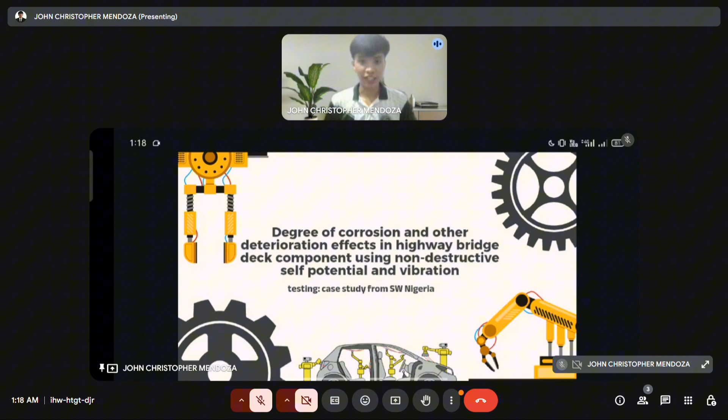Next, the topic outline includes the background, introduction, methodology, results and discussion, and the conclusion. First is the background. The study illustrates key structural components of a bridge: abutment, piers, expansion joint, deck surface, surrounding environment, and spread footing, highlighting signs of deterioration due to corrosion, vibration, and environmental exposure.

The abutment shows vegetation and possible erosion, while the piers are vulnerable to water-induced cracking and corrosion. A damaged expansion joint may cause stress concentration and material degradation. Surface wear and misalignment on the deck indicate possible foundation movement. The nearby river bank suggests erosion risk, and the spread footing is exposed to potential scour and settlement.

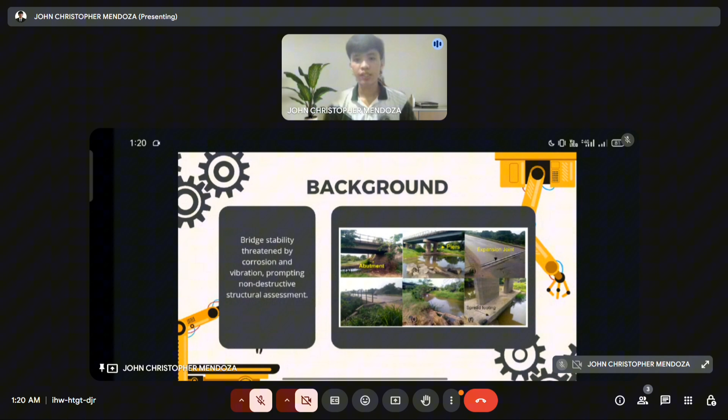These signs underscore the need for non-destructive structural assessment such as ultrasonic testing and ground penetrating radar to evaluate internal damage and ensure the bridge's stability and safety without causing further harm.

And for the introduction, this study assesses corrosion and vibration in Ogbese Bridge using combined non-destructive electrochemical and vibration methods. The image introduces the study aimed at evaluating the structural health of the Ogbese Bridge, with a particular focus on the effect of corrosion and vibration.

The study uses a combined approach of non-destructive electrochemical and vibration-based methods to assess the bridge condition. This method is particularly important because it allows for a comprehensive diagnosis of internal and external structural issues without damaging the bridge. The choice of this technique reflects the need for precise, real-time data to detect early signs of deterioration and inform appropriate maintenance strategies.

The image states the primary objective of the study, assessing the corrosion and vibration, while the right side presents a conceptual model that explains how corrosion progresses over time and the implication it has for maintenance and structural integrity. The graph divides the corrosion lifecycle into three distinct phases: the corrosion initiation phase, corrosion propagation phase, and finally the replace or failure phase.

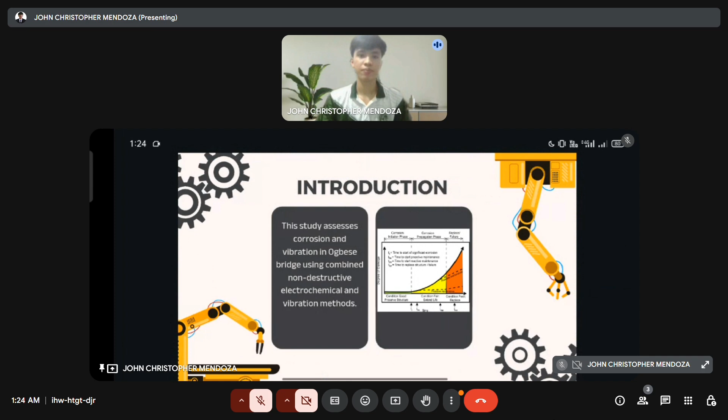And then for the methodology, these factors are critical in understanding deterioration patterns that can compromise the structural integrity of the bridge over time. Corrosion, for example, can weaken metal components such as steel girders, while the mechanical vibration caused by traffic loads or environmental forces can lead to fatigue and eventually failure of structural elements.

The influence of environmental conditions such as moisture and temperature variations further accelerates the degradation process. The image of this bridge especially highlights the steel girders, which are essentially load-bearing components. These girders are more often susceptible to corrosion due to exposure to the elements.

The visual serves to contextualize the study by offering a real-time view. The bridge structure helps to identify where such deterioration might occur, emphasizing the importance of continuous monitoring and maintenance to ensure structural safety.

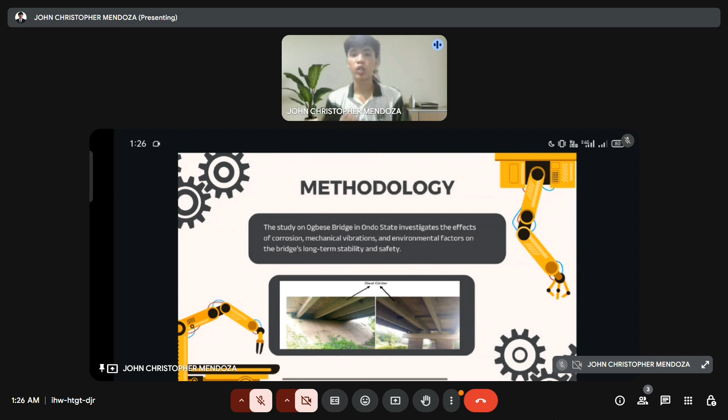For the data acquisition and analysis, the first image presents the detailed layout of the data collection process across the entire bridge structure. It shows the strategic placement of traverses, horizontal surveys running across the width of the bridge, and the data points SP along the length of the bridge from the southwest to the northeast.

The bridge is divided into four spans supported by the abutment and piers, with a specific emphasis on vibration measurement positions on the piers. These points help to capture mechanical vibration affecting the bridge stability. The inclusion of pedestrian walkways and central zones in the traverse arrangement. Traverse 3 is labeled as ground penetrating radar or GPR, which is used to investigate subsurface conditions that may not be visible on the surface.

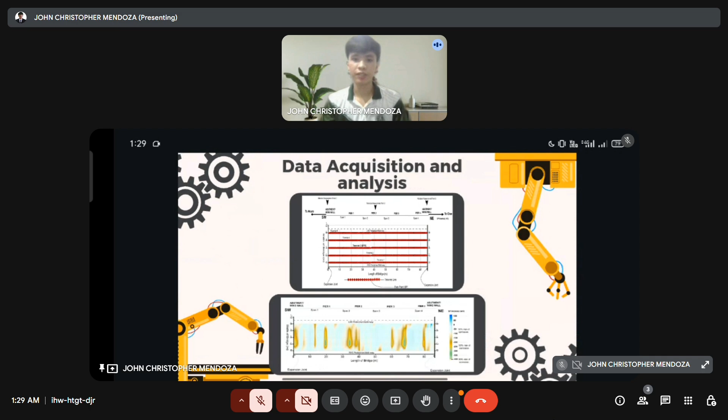For the results, the findings from half-cell potential measurement indicate that most of the bridge deck has generally low corrosion. Localized anomalies, particularly near the piers, suggest potential areas of reinforcement corrosion. These findings highlight specific zones that may require targeted inspection and possible repair to maintain structural integrity.

For the graph, the graph on the top shows velocity, the red line, and acceleration, the blue line, responses across a series of vehicle numbers. Some vehicle crossings exceed the unsatisfactory and even unacceptable vibration intensity, especially in the early vehicle numbers, suggesting parts of the bridge may be experiencing excessive dynamic responses, potentially compromising user comfort and long-term performance.

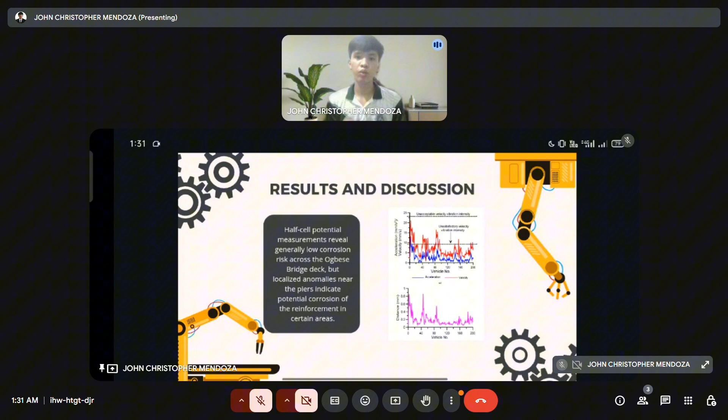The bottom graph tracks displacement, revealing peaks that further support the presence of dynamic irregularities in the bridge structure. These fluctuations suggest that some sections of the bridge experience more significant vertical movement, which could correlate with structural weakness and deteriorating joints.

And next, for the conclusion, the Ogbese Highway Bridge has been assessed for probability of corrosion in the concrete slabs and excessive vibration phenomena based on the combination of two non-destructive methods, that is, the half-cell potential method and the vibration measurement.

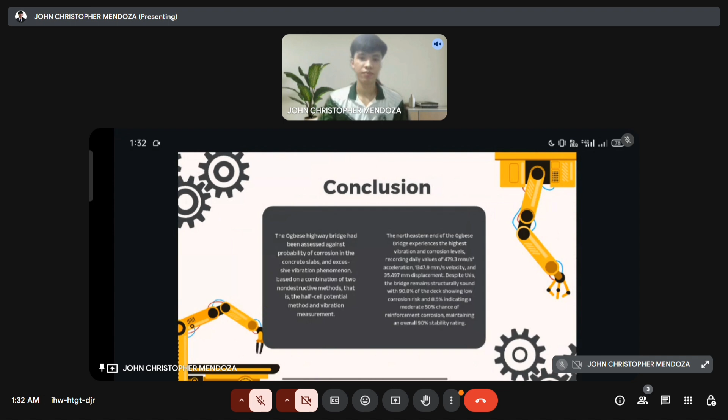So that brings us to the end of the presentation, and I hope it gave you a clearer understanding of the degree of corrosion and other deterioration effects in highway bridge deck components using non-destructive self potential and vibration.